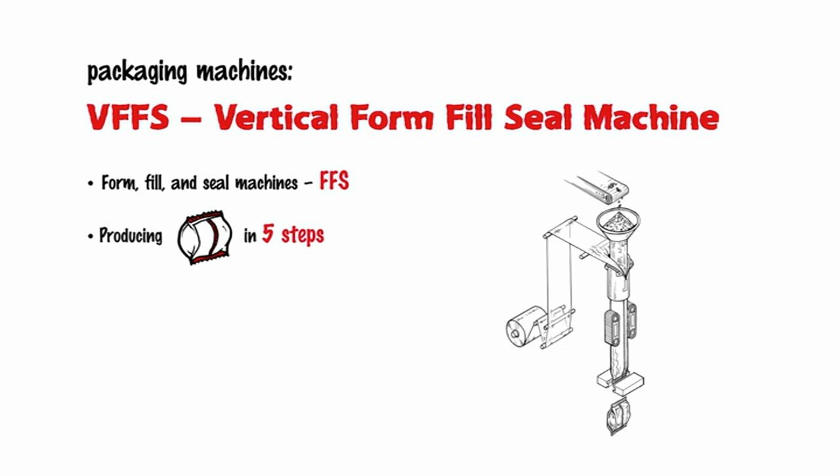The operating principle of these machines can be divided into 5 steps or applications. Step 1.

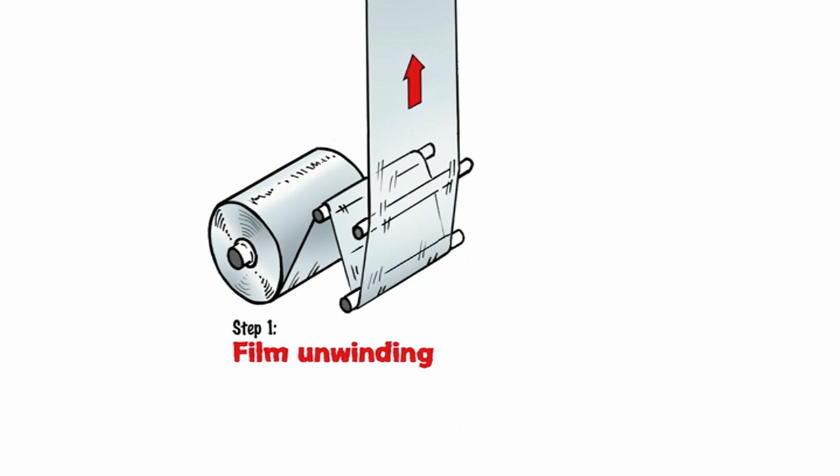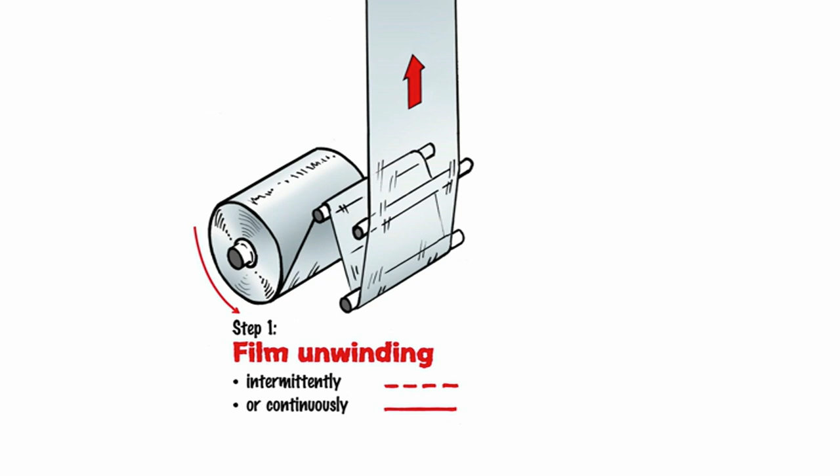Film unwinding. The raw material used for the bag is a roll of film, which passes through a labyrinth of guide rollers and dancers on its way to the finished end product. The film unwinding process and other steps either run intermittently, i.e., cyclically, or continuously, as is the case in the high-speed sector. The film unwinding process can either be implemented by the film takeoff unit, which can be found in process step 4. Or an additional motor is located directly on the roll of film.

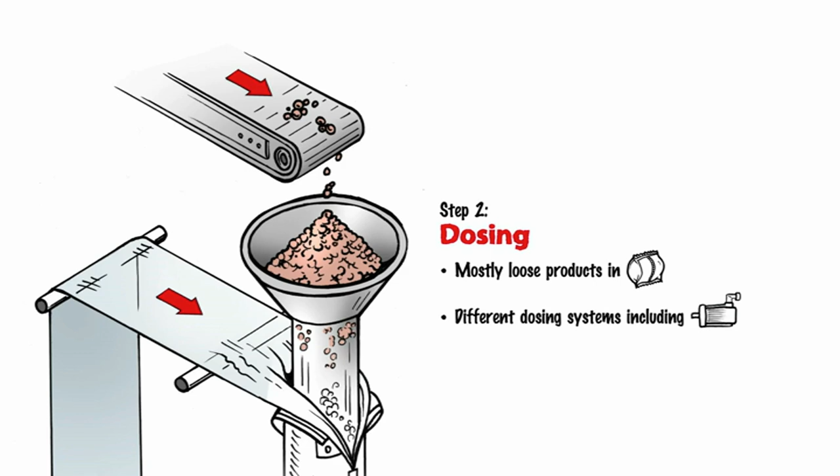Step 2. Dosing. Vertical FFS machines are mostly used to fill loose products, granulates, and dough-like or difficult-to-process products. Different dosing systems are available depending on the consistency and value of the product. Electric drives are usually found in the product feed area and in the dosing unit itself.

Step 3. Forming shoulder. The forming shoulder forms a tubular shape from the previously open, flat film. To prevent friction from occurring and cuts in the film, the forming shoulder is individually tailored to the material of the film.

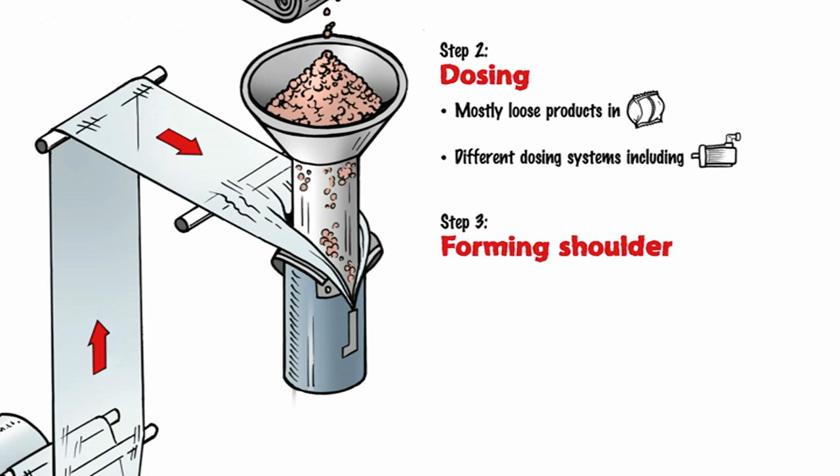Step 4. Film takeoff unit. The film takeoff unit usually consists of 2 belt straps that are pressed against the sides of the film. The film is then pulled downwards due to the resulting static friction. Basic machines use a pull effect after the forming shoulder to remove the film.

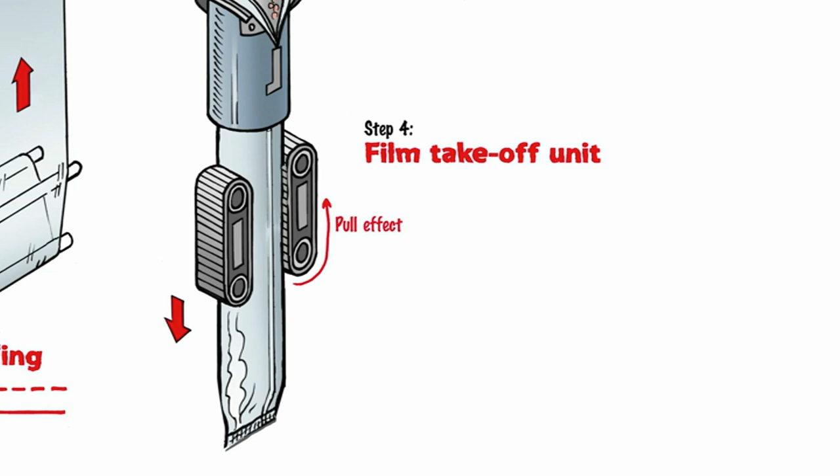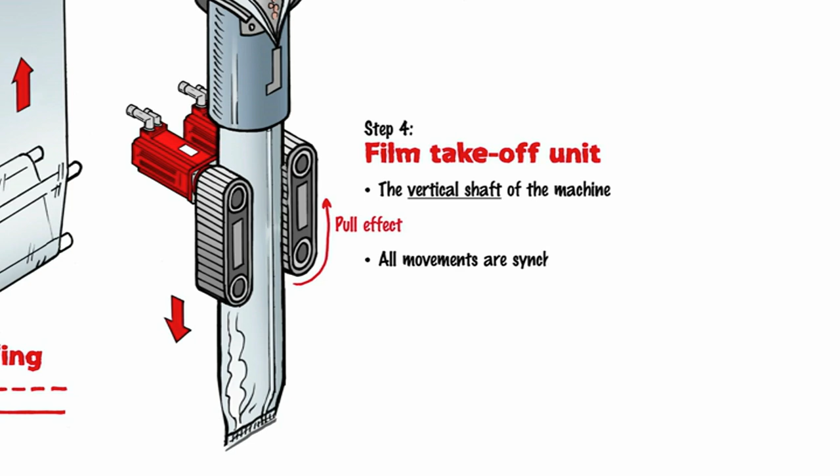High-performance machines, on the other hand, use an additional motor on the film unwinding unit. The film takeoff unit, or the corresponding drive, predetermines the speed for the entire machine. This is also referred to as the vertical shaft of the machine. All movements are synchronized on this axis.

In the area of the film takeoff unit, the film is sealed lengthwise along its open edge. This step can be performed before or after the film takeoff unit. The product is filled in parallel. Vertical FFS machines use gravity for this purpose.

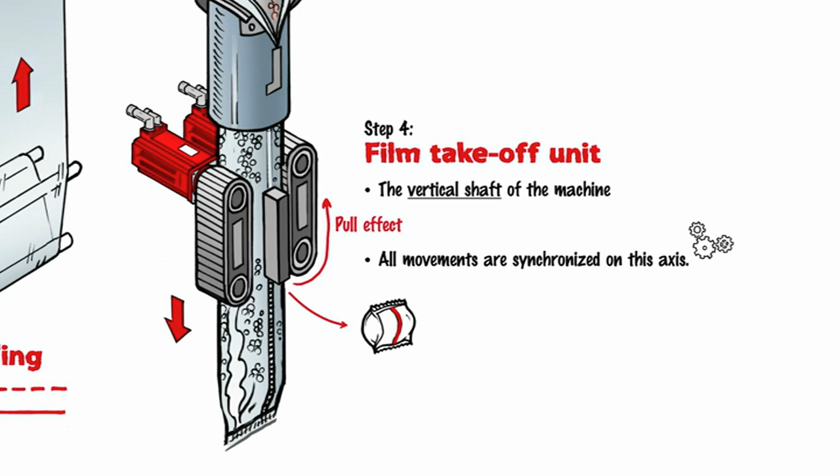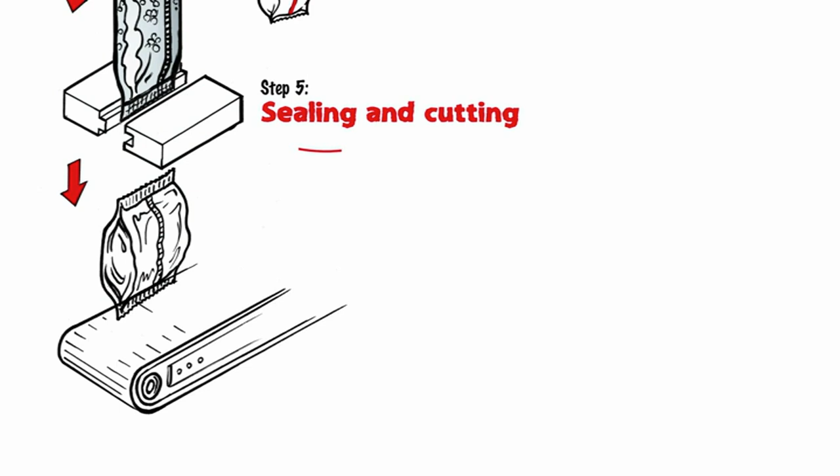Step 5. Sealing and cutting. During the final step, the filled bag is provided with a transverse seal by sealing jaws. The seal of the full bag simultaneously forms the first transverse seal of the new bag. This seam is divided in the same pass by a blade, which can be integrated into the sealing jaws.

This separation is often necessary at a very specific position due to the imprint on the bag. This is the reason why so-called print marks are located on the film.

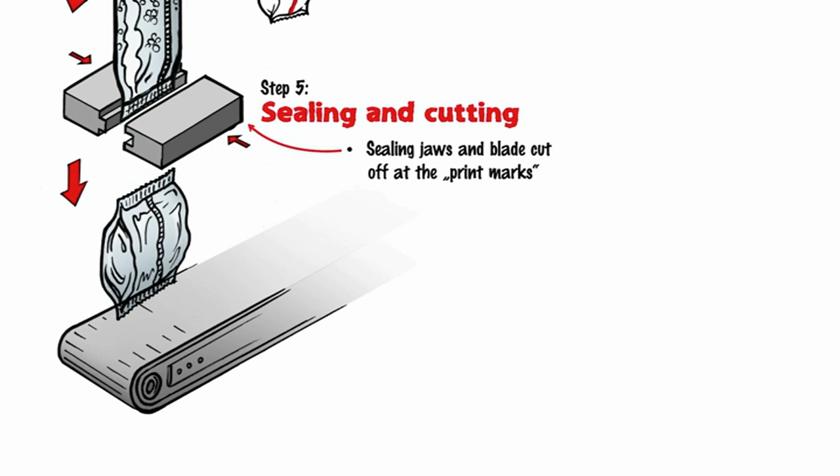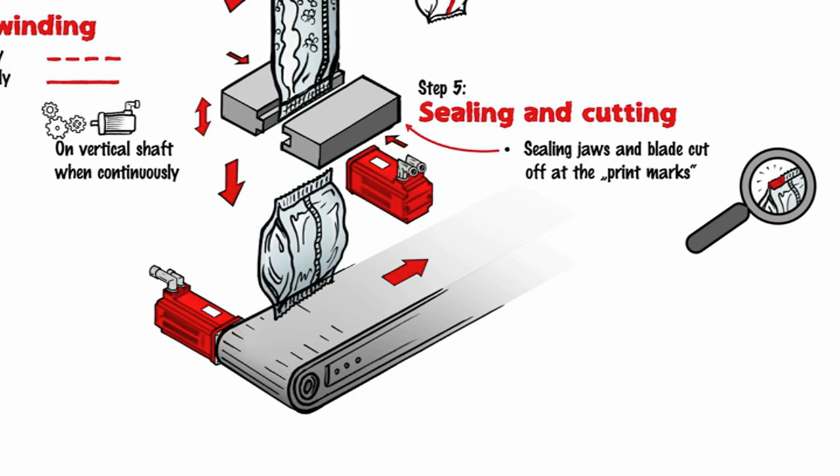In the case of intermittent machines, this process step occurs when the bag is stationary. In the case of continuous machines, the sealing jaws are operated together with the blade. As a result of the additional synchronization that is required, continuous machines are more complex than intermittent machines.

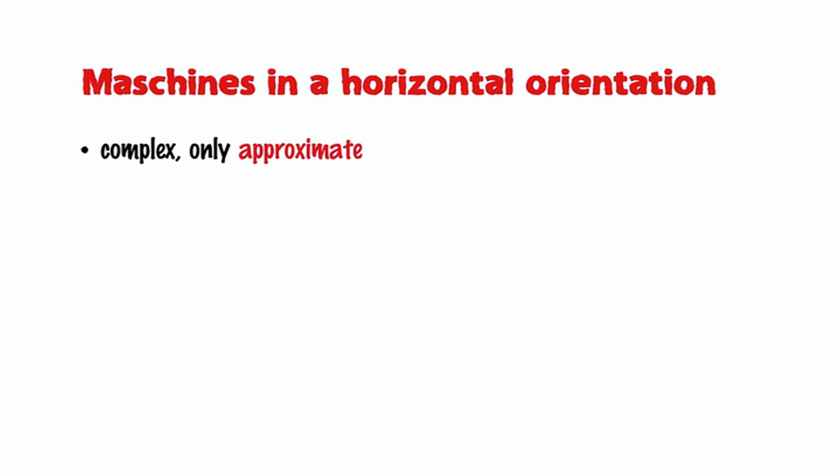Transfer to a horizontal FFS machine. In principle, the vertical FFS machine is also capable of operating in a horizontal orientation. Horizontal machines, however, are more complex and only account for approximately 15% of FFS machines. Horizontal FFS machines are used for products that can easily be counted, such as chocolate bars or dishwasher tablets.

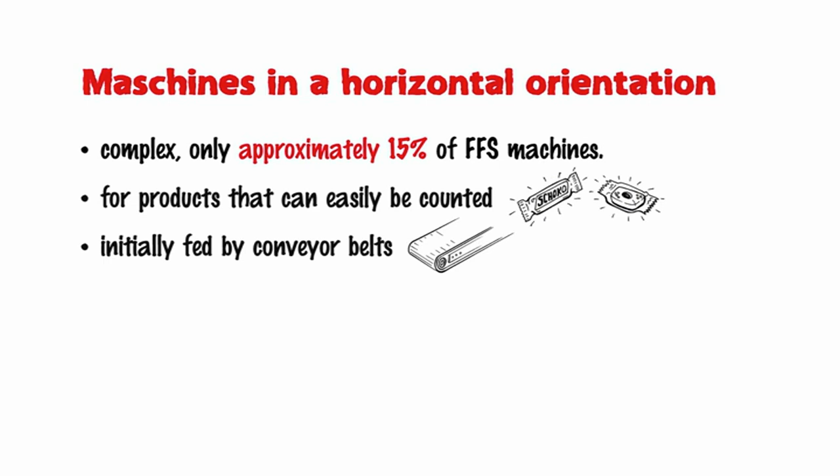The products are initially fed by conveyor belts. The product is then accelerated with the help of a compartmentalized conveyor belt and shot into the bag. This conveyor has a very high speed. All of the other process steps are comparable to those of the vertical machine.

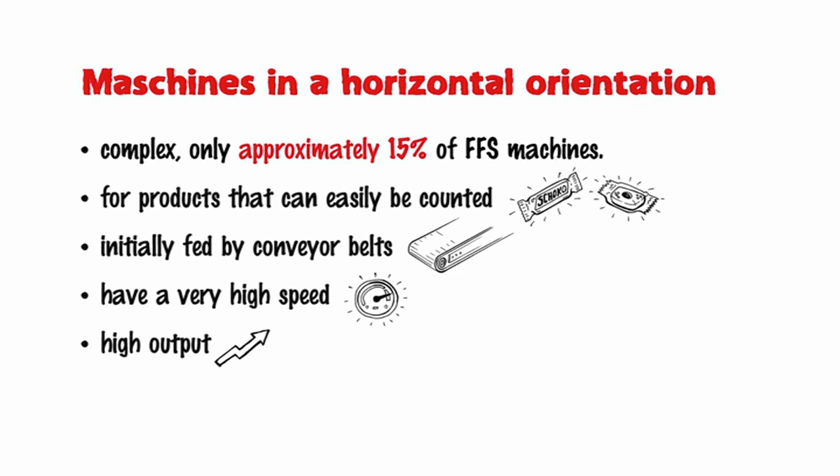On the whole, horizontal FFS machines have a very high speed and therefore a high output. With a standard range of 300 to 400 bags per minute, horizontal machines can fill twice as much as vertical machines.

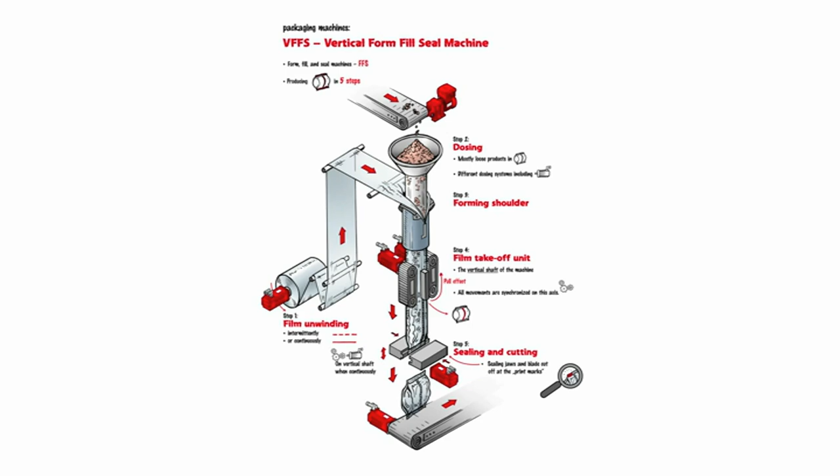For SEW Eurodrive, these process steps mean the automation of a wide range of motion tasks. Regardless of whether the drive technology is used for unwinding, dosing, film takeoff, transverse sealing, or removal processes, SEW Eurodrive offers the corresponding solution in terms of both hardware and software.